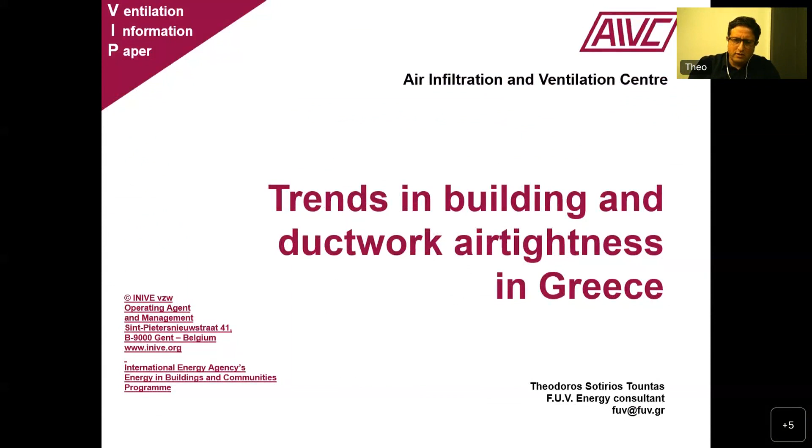I'm working in Greece. I'm active in Athens, and I want to present our research regarding the trends in building and ductwork airtightness in Greece. So let's start with the building market at the moment.

So I have the data from the Hellenic Statistical Authority, where we can see that for 2 years, from 2018 to 2020, we had a 23% increase in building permits, and about an 18% increase of the new building areas. So from 3.5 million square meters to 4.1 million square meters, more or less.

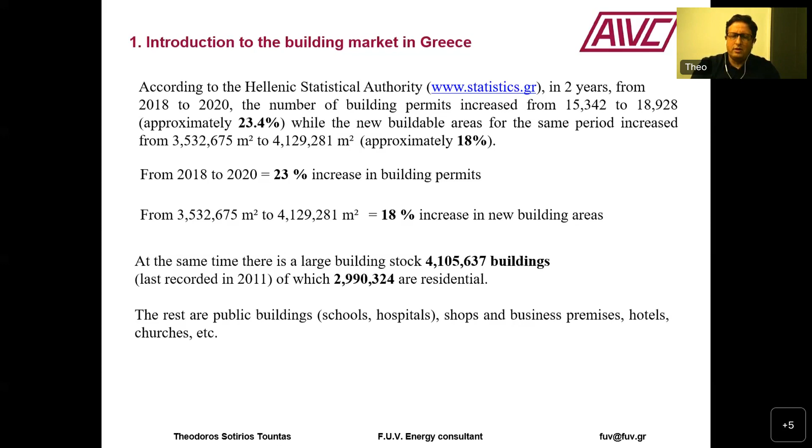At the same time, we have a large building stock, about 4 million buildings, in which about 3 million are residential, and everything else is schools, hospitals, shops and business premises, hotels, churches, etc.

Talking about energy consumption, because now we are talking on airtightness, because airtightness is the key factor for the energy consumption. So again, according to the statistics in Greece, we have about 300 kilowatt hours per square meter for residential buildings, 450 kilowatt hours per square meter for hotels, and 790 for public buildings. So we can see that we have a large amount of consumption for buildings in Greece.

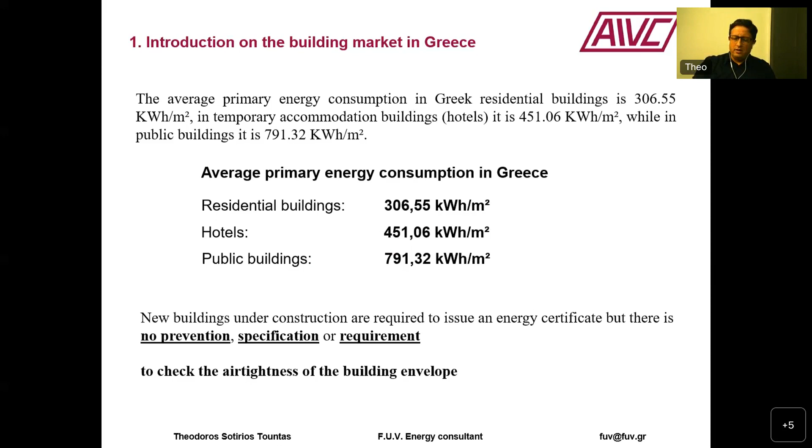At the moment, we issue the energy certificate, but there is no provision or specification or requirement to check the airtightness of the building. Of course, we know that it is important, and we take into account the airtightness. So we consider the airtightness, but we don't measure the real airtightness at the moment.

So we can see in the official form of energy inspection of buildings of the Greek Ministry that the airtightness depends on type of frames, quality of the cracks, obviously we talk about the envelope, and the orientation of the frames. Well, this is a point where there is a small misunderstanding, because we believe that airtightness depends only on the frames.

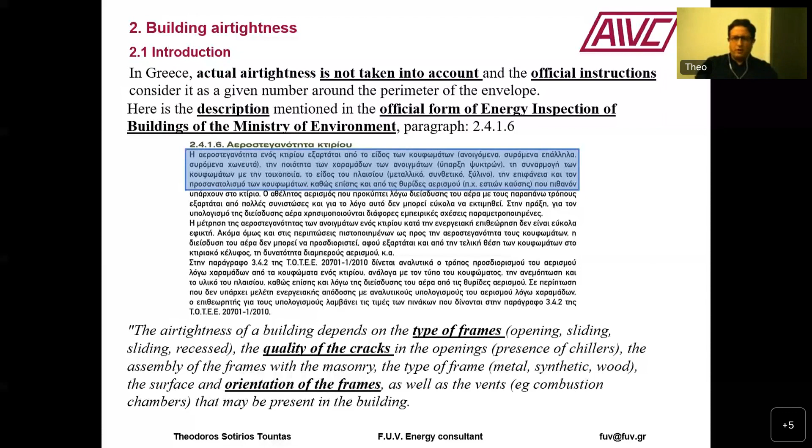And then in the same description, we can see that it is the unintentional ventilation. It is said that it cannot be easily estimated, and there are empirical practices to calculate the infiltration. So the energy inspection is not easy to carry out, so we still don't have a lot of information coming from our ministry regarding the effective, the real testing methods.

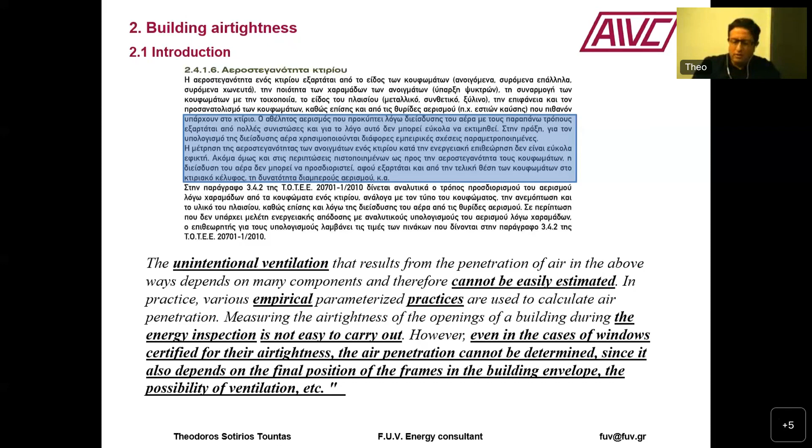So we also have this specification telling that even in cases of windows certified for their airtightness, the air penetration cannot be determined, because it depends on the final position of the frames, obviously, the building envelope. So also the Technical Chamber of Greece is dividing 3 categories: low, medium and high categories of airtightness.

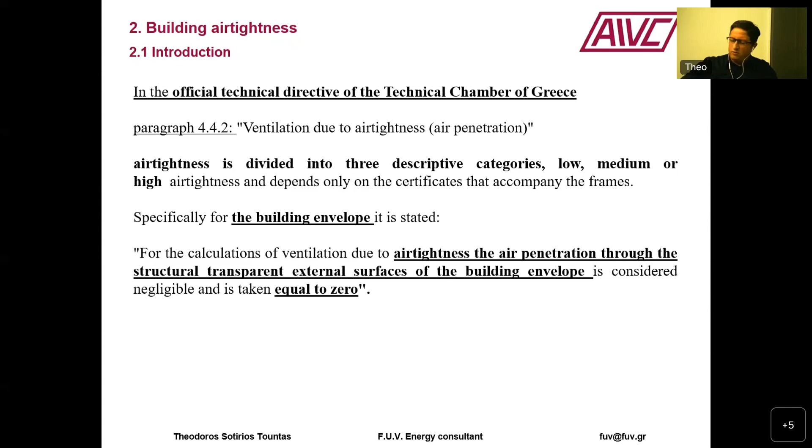And regarding the building envelope, it is stated that the leakage of the building envelope is equal to 0. So we take under consideration that the envelope is perfect, and we use a lot of default values, as we can see, for our regulation, for our calculation. For example, there are typical penetration values due to cracks per unit.

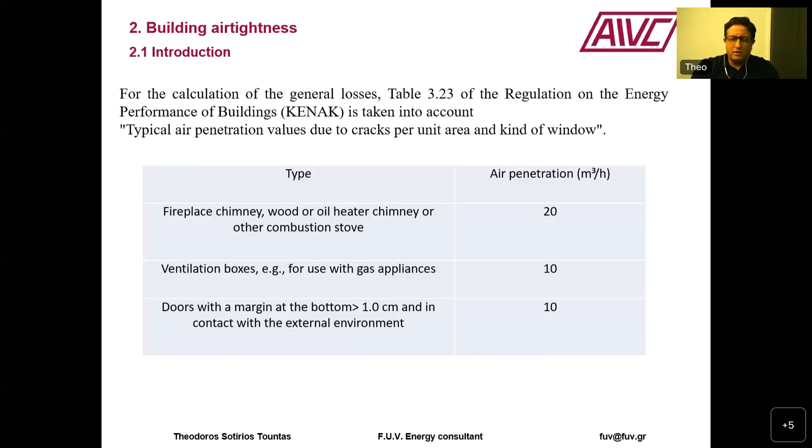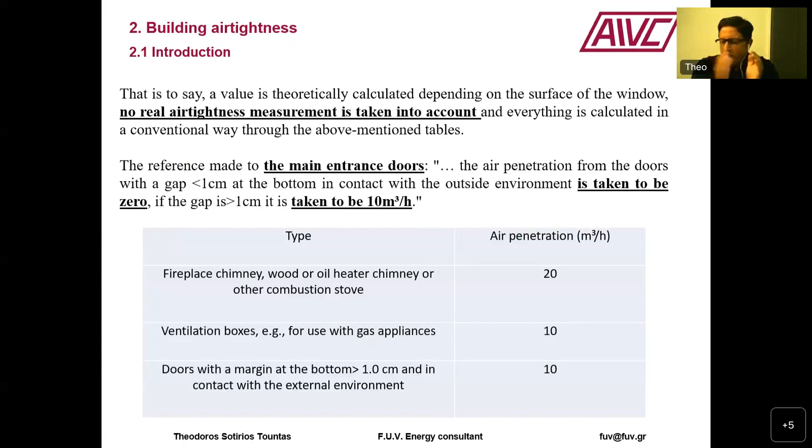So we have some numbers here, and I can give you an example of how to take under consideration, for example, the main entrance. So if the gap under the main entrance is less than 1 centimeter, it's taken to be 0. And if it's more than 1 centimeter, we take under consideration 10 cubic meters per hour. So there are a lot of default values that are being applied to the calculation.

For the last 6 years, there has not been any upgrade of the regulation. So we still build new houses with outdated guidelines, which means that buildings built with an A+ today, with the next upgraded regulation someday, probably will be B- or B+, I don't know.

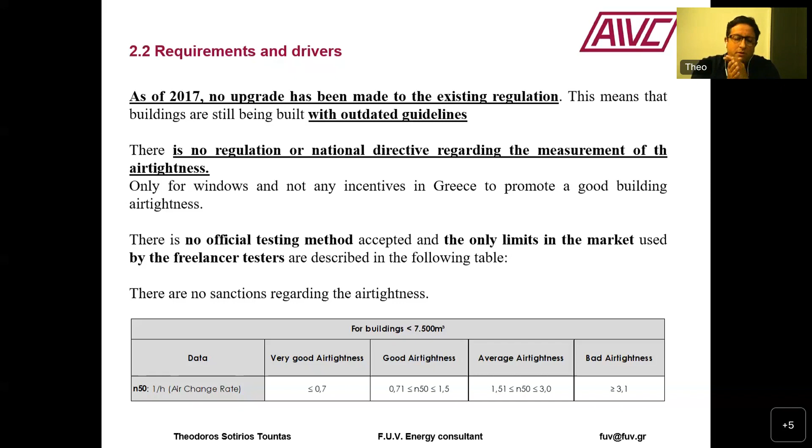But there is no regulation or national directives regarding the measurement of the airtightness. There is no official testing method and no limits in the market, but we just have freelancers, more freelancers coming into the market in Greece, and for buildings less than 7,500 cubic meters, we use some numbers related to N50 air changes per hour.

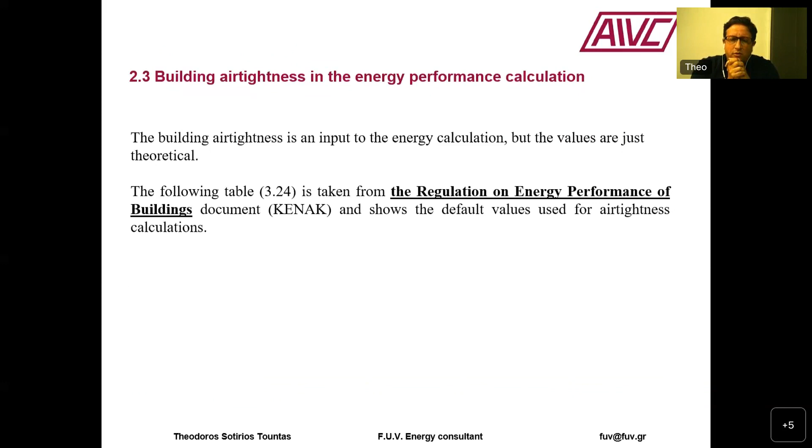So regarding the energy performance calculation, we use the so-called KENAK, the regulation of energy performance for buildings, and we have this table 3.24, where we have numbers. So here we can prove that we realize the importance of the airtightness.

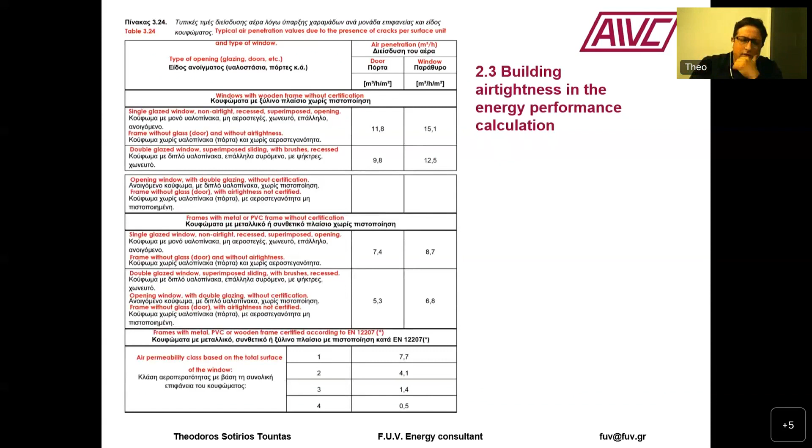But by using only default values, we do not reward a better installer over a worse installer, or we do not reward a very good company of aluminium or PVC or whatever, compared to another, but just use default numbers. So regarding the test protocols, there's not any official certification.

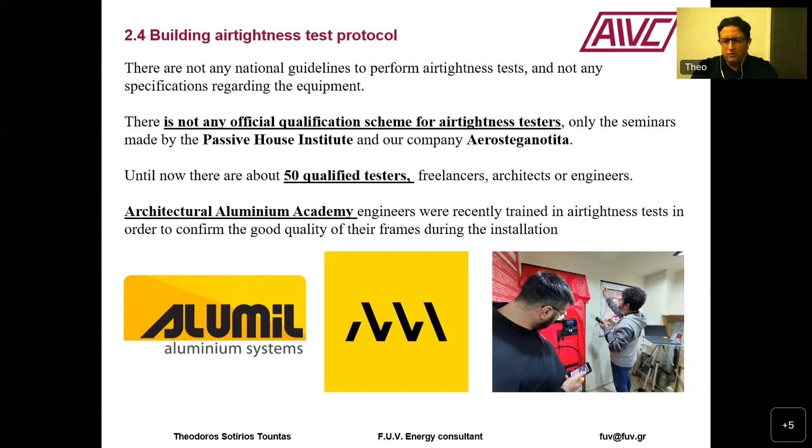Until today, we have about 50 qualified testers in Greece, and the air tightness test is promoted a lot by the Passive House Institute and our Aerosteganotita company. And lately, we have companies like Alumil that are training their engineers to confirm the good quality of their frames and their work. So the issue of air tightness is getting better, more known.

At the moment in our market, the only companies that require the blower door test are Lidl, for the supermarket buildings, and some buildings under renovation or new constructions are asking for an inspection, mostly when there are problems, or obviously if there are passive houses.

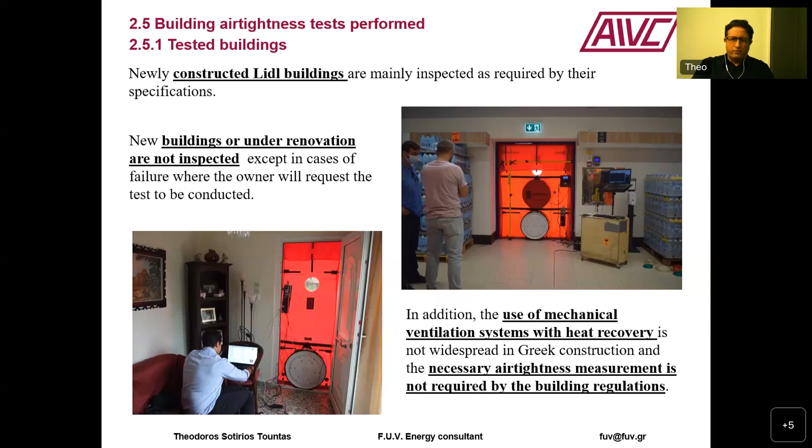And regarding the mechanical ventilation system with heat recovery, which is not very widespread in Greece yet, we all know that if we have an N50 of more than 3, these machines do not work efficiently. So it's not very known as a method. Regarding the database, we have since 2011 about 100 measurements. Of course, there are more measurements. We invite colleagues to share with us and to make a bigger database.

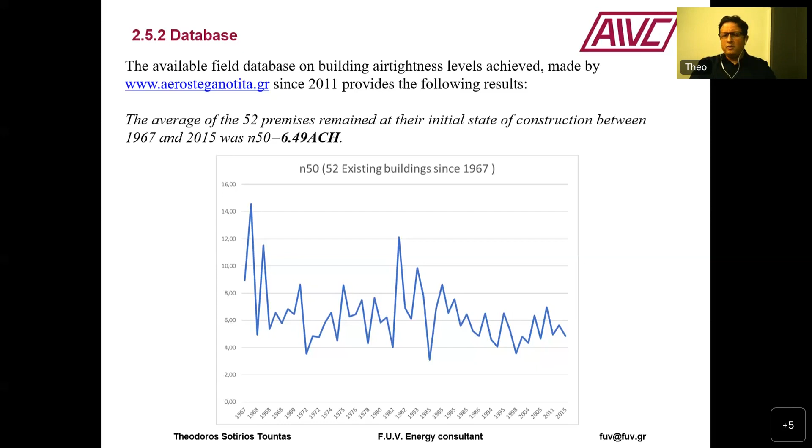And now I'm just giving a quick presentation of the 100 database tests we performed over the last 12 years, more or less. So out of 52 premises that remained as they were built from 1967 to 2015, the N50 was 6.49 air changes per hour, and we measured 34 refurbished premises, with an average N50 of 3.43.

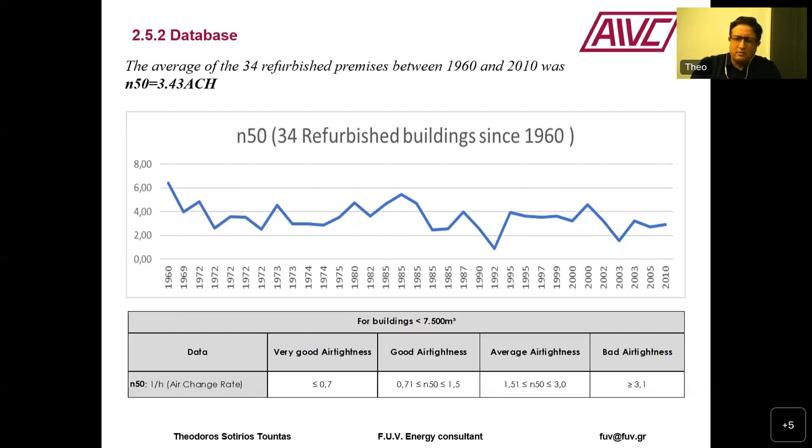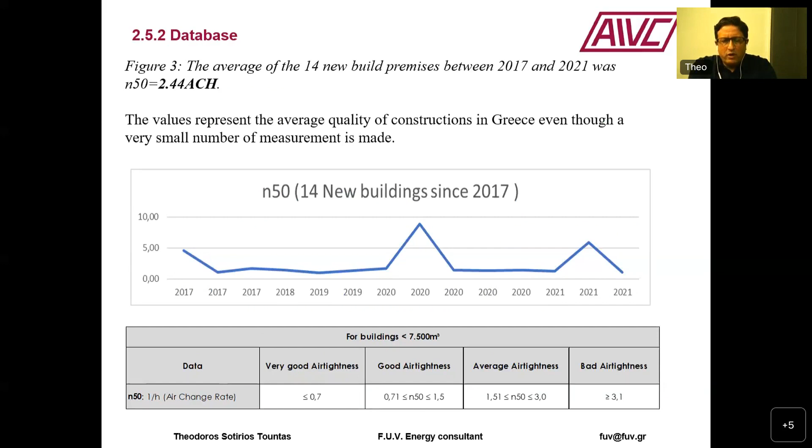So we can see that even if a building has been refurbished, we still have bad air tightness. And we measured 14 new constructions that were at about 2.4 air changes per hour. So we have improved the construction a lot, obviously, but regarding air tightness, there is more to do.

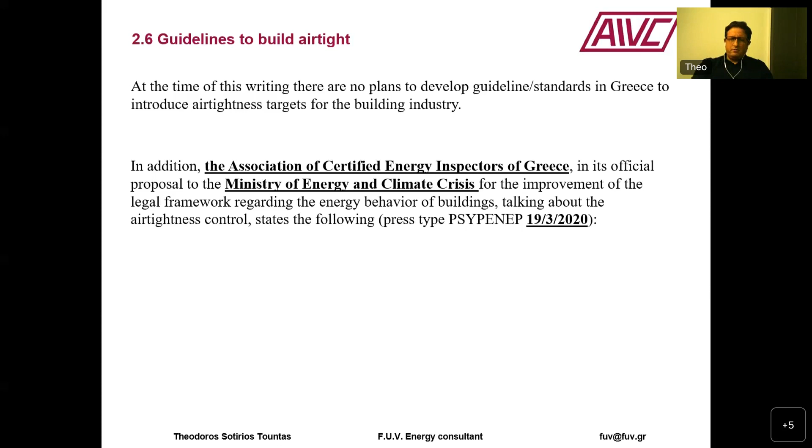Regarding guidelines, at the moment there are no signs of guidelines and standards being introduced. Unfortunately, there's a misconception because the ministry talks about air tightness and believes that air tightness has to do only with the frames. And there's a problem because, for example, the Association of Certified Energy Inspectors in Greece stated in 2020 that, in simple words, we don't need measurements made by expensive equipment, because these standards are for Germany.

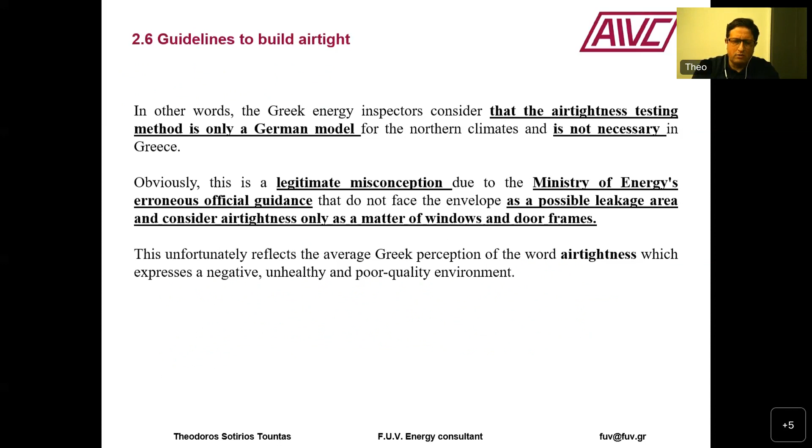Obviously, these misconceptions come because the Passive House Institute has promoted airtightness a lot. So it is believed that it's from Germany, but it's not, it's European, it's worldwide. We know that airtightness is important. So we invite our colleagues to reframe and to see how we can build better buildings by improving the airtightness.

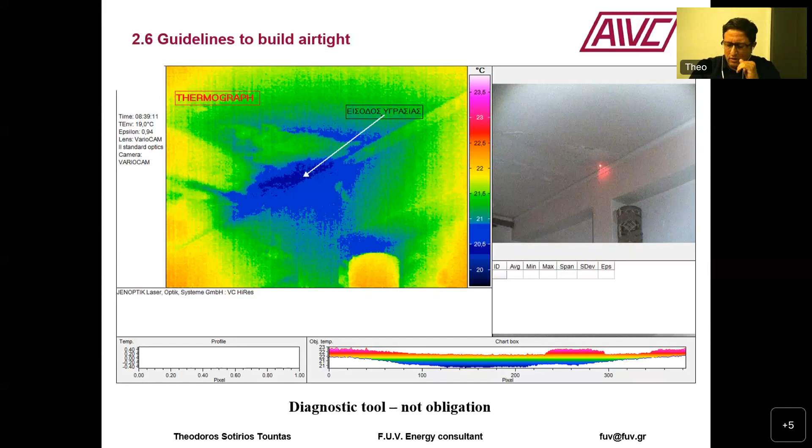Regarding the cost of the machinery, we all know that thermal cameras, which are much more expensive, are in the market. So the market is ahead of the request. So we have a lot of freelancers that are already performing blower door tests, and it's good to have more data.

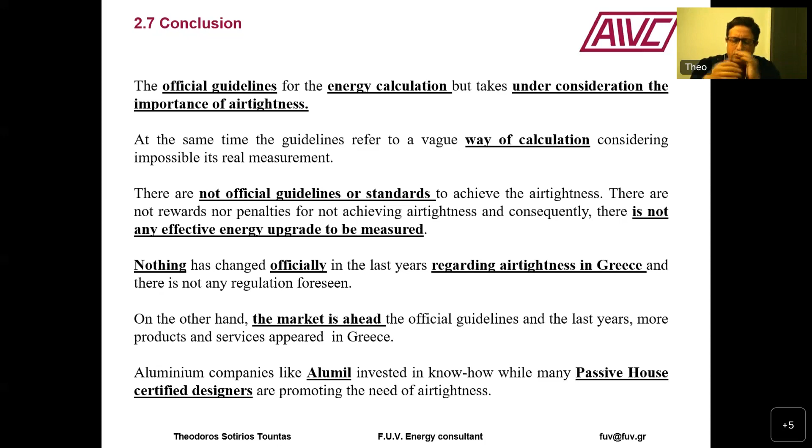As a conclusion, I would say that we realize the importance of airtightness, but we still don't have a way of calculating or measuring the tightness. There are no official guidelines at the moment, and the only sign is that the market is ahead, and a lot of innovative companies are trying to catch up with airtightness controls.

Since last month, we have the Greek Airtightness Testing Association, where we invite freelancers to take part in our association, to share their data with us and make a larger database. We saw that in France, they have more than 500,000 tests in their country. We have about 100 at the moment, maybe 200 in Greece, so we have a lot to improve.

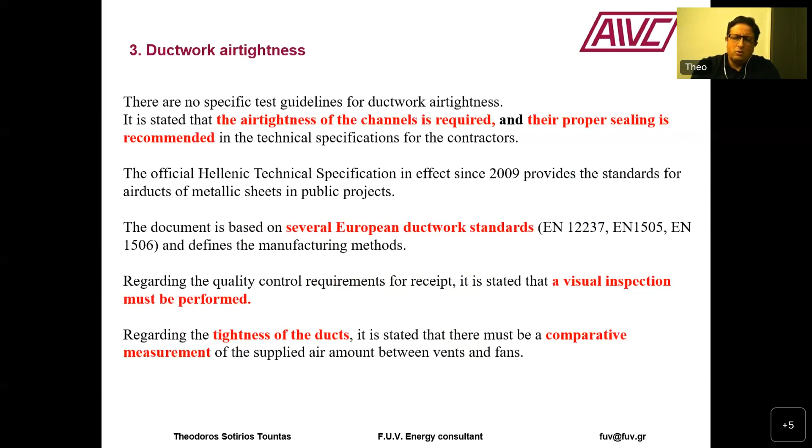And finally, regarding the ductwork, it is also important to control its tightness, but in our legislation we only speak about visual inspection, and we know that ducts have to be tight, but there's no way of controlling it. Last year, in 2022, we had a new draft technical specification to renew the 2009 technical specification regarding the ducts.

And the only difference in the latest version is that the Pitot method is described, and we know that we have to control the ducts, but we still don't know the way to do it, so there's no request for this technique. So we have a lot to do.